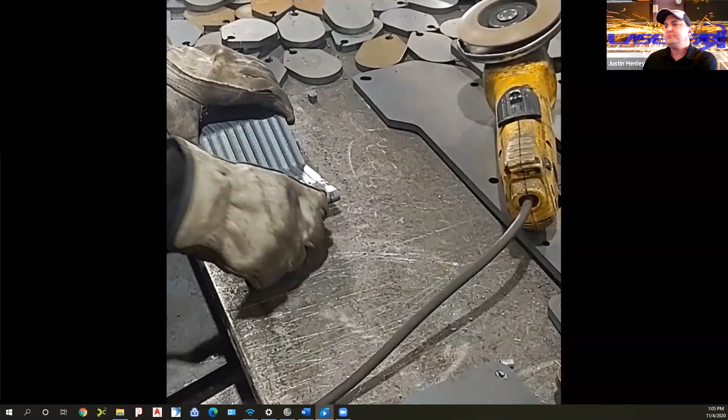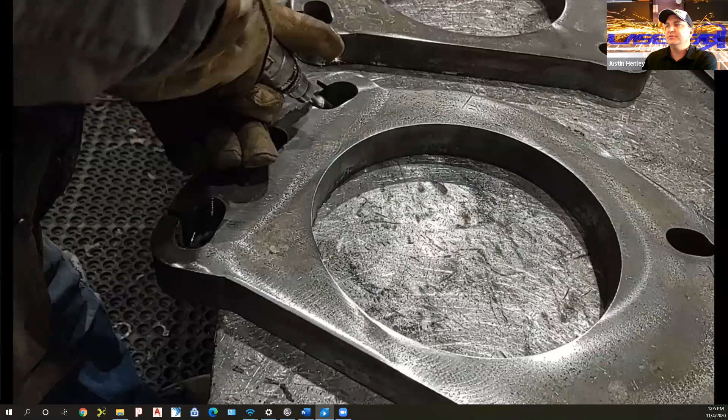So first clip is... oh, that's not the first clip. All right, first clip is deburr. Deburr is a process of removing dross and slag and tabs from cut parts. It's what you see, various hand tools, grinders, chisels, things of that nature. Our deburr personnel are integral in making sure that any imperfections of the parts are caught and handled before they move on to the next phase of the process.

And a brief job description for deburr, general labor, and production helpers: employees will be required to perform a variety of production-related functions and activities. Job responsibilities require discipline and attention to detail at a high level of accuracy, thoroughly following work orders and job instructions, using computer software to track work in progress, deburring, grinding, and part breakout with multiple types of hand tools. Must be able to consistently lift and move parts weighing up to 50 pounds, forklift operation, strong communication, interpersonal and problem-solving skills, the ability to work with limited supervision, and a commitment to customer service.

Have a proactive, positive attitude and strong sense of self-motivation, accountability, and responsibility. Able to learn to read and understand job travelers and use precision measuring equipment when necessary. Demonstrated ability to read and understand English in order to communicate and understand instructions and safety criteria. Proficient in shop math skills, accuracy with decimals and fractions specifically, manual dexterity and mechanical aptitude, have relevant computer experience including personal computer basics, forklift experience is preferred, and pass a pre-employment drug screen.

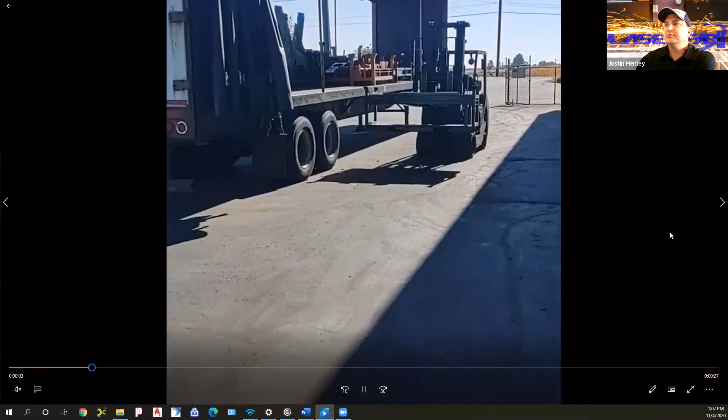The next video covers shipping. Shipping is what you would expect: the process of making sure that the parts we've made get to our customers.

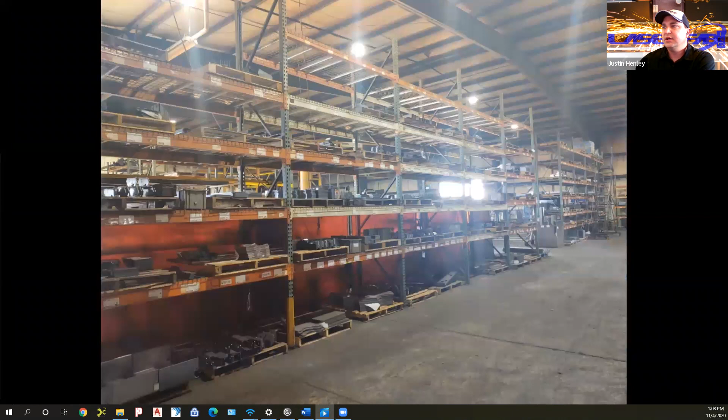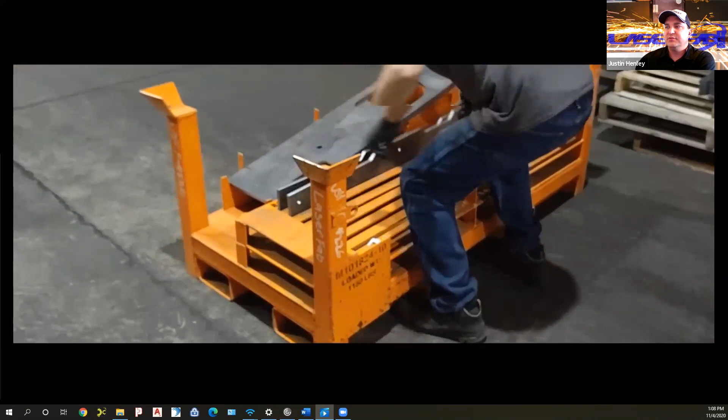We warehouse over 1,000 different part numbers for various customers, so it requires a high level of attention to detail. Specific customers have specific loading instructions and specific part handling instructions, so it's definitely a job that requires conscientious personnel.

The job description includes: receive and verify items, place material in bins or racks, count items, add totals on bin cards, pull items for shipment, deduct from bin cards, box, crate, and/or place on skid for shipment, complete documentation and load trucks, and use forklifts, pallet jacks, and strapping tools to accomplish most tasks.

Must be willing to comply with company rules and policies, pass a pre-employment drug screen, have a valid Washington State driver's license, be detail-oriented, accurately use tape measures and calipers, able to lift up to 100 pounds on occasion, able to read, write, understand, and communicate in English, have basic math skills, neat and legible handwriting, strong clerical skills, and a minimum of one year of forklift operation experience. Duties include placing manufactured items of various shapes and sizes in stock, pulling parts for internal or external customers, checking in received items and verifying paperwork is correct, cleaning up shops and yards as needed, loading and unloading trucks, and other duties as required.

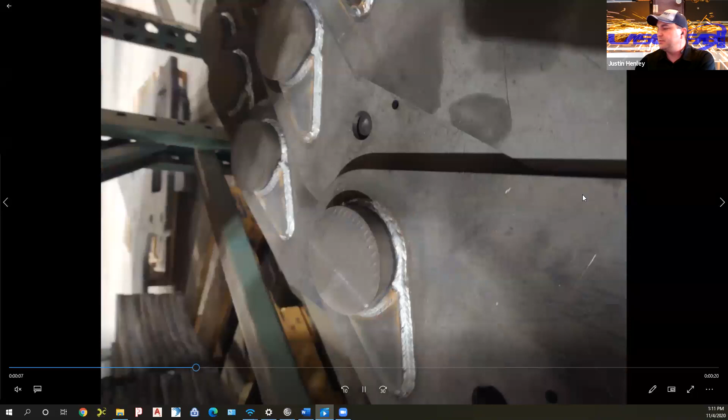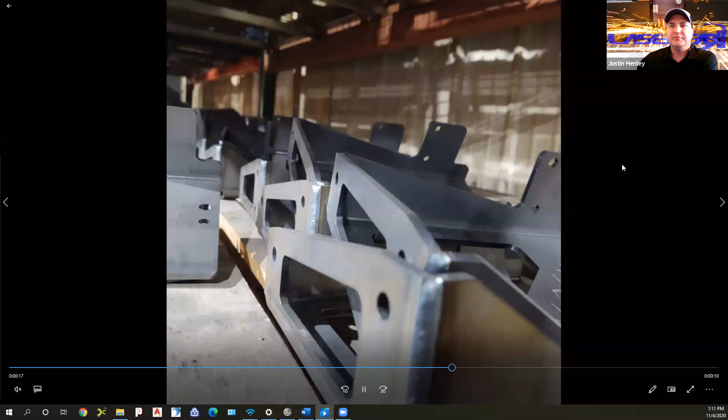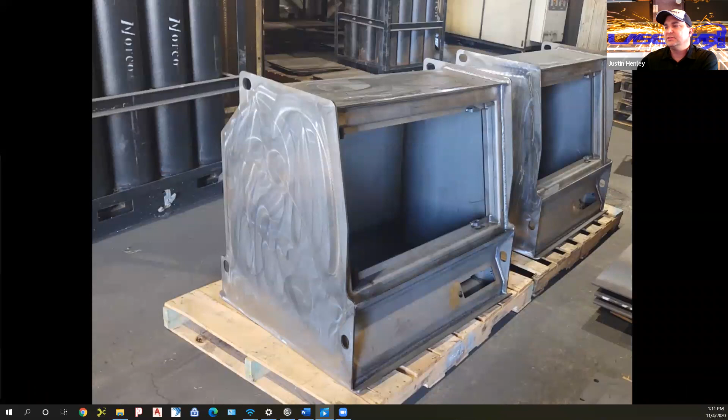The next video has to do with welding, which covers fabrication assemblies that vary from simple parts to more complex assemblies, with varying thicknesses and material types. This is actually one of our ballot boxes. We produce Vote Armor ballot boxes solely as a LaserFab product.

For a welding position, sheet metal fabricating, layout, and print reading experience is necessary. Experience is preferred in production and industrial fabrication equipment. Must be able to fabricate from shop drawings, with experience fabricating light gauge sheet to heavy metal plate. Must be able to hold tight tolerances, have experience using precision measuring tools, and have attention to detail with the desire to produce the highest quality work.

Ability to work in a fast-paced team environment, communicate and independently execute work instructions, basic math and computer skills, a positive attitude, dedication to attendance, ability to lift 50 pounds and stand for long periods of time, be highly motivated, and work with little to no supervision.

Must be able to work all shifts and overtime as needed, and pass a pre-employment drug screen. If that's not stated on all of them, we are a drug-free company at the federal level, so all employees must be able to pass and continue to pass random drug screening.

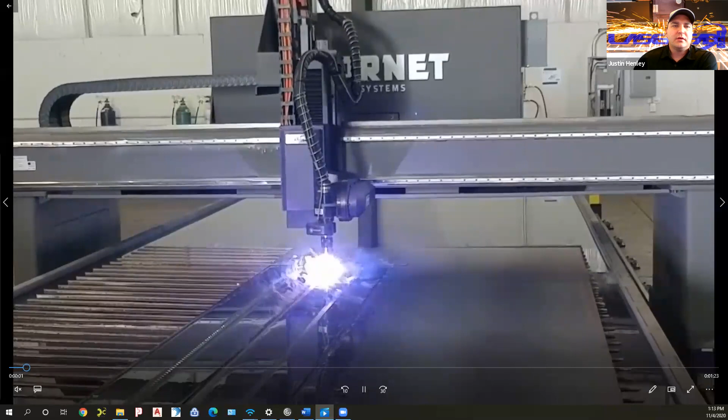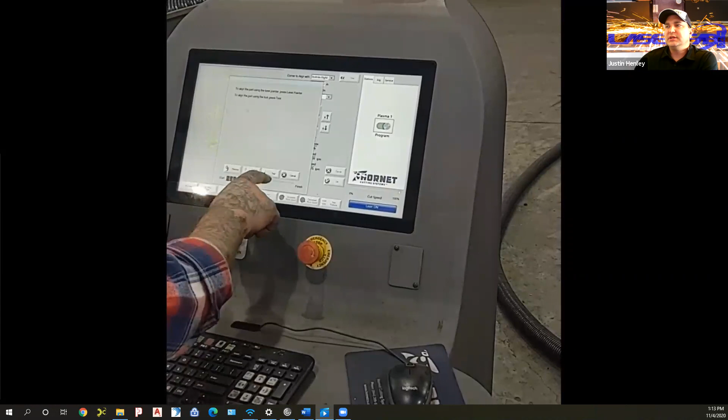We also have two high-def plasma cutters that we put in within the last couple of years. These machines are able to cut anything from gauge material up to 2-inch thick steel. Operators have to be able to interface with the control system, so basic computer skills are a must.

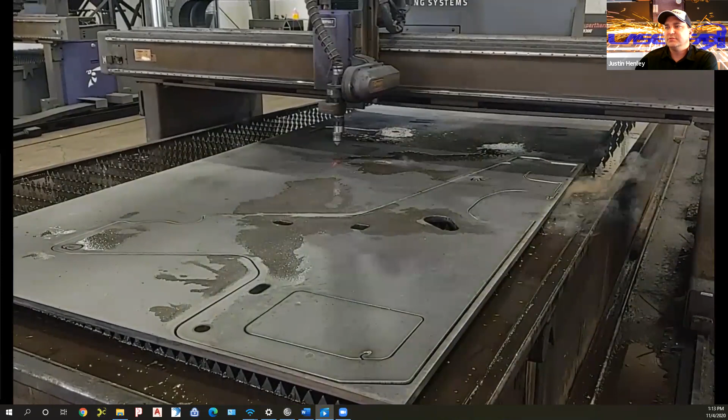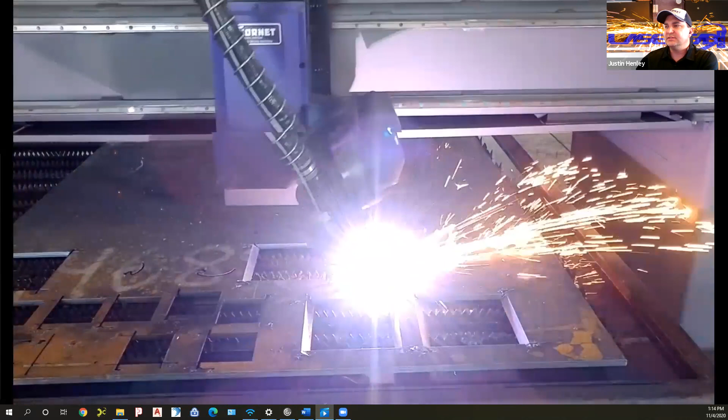The parts that come off vary in shapes and sizes. One of our machines, as you see here, is actually a 5-axis machine and can bevel a part in one pass.

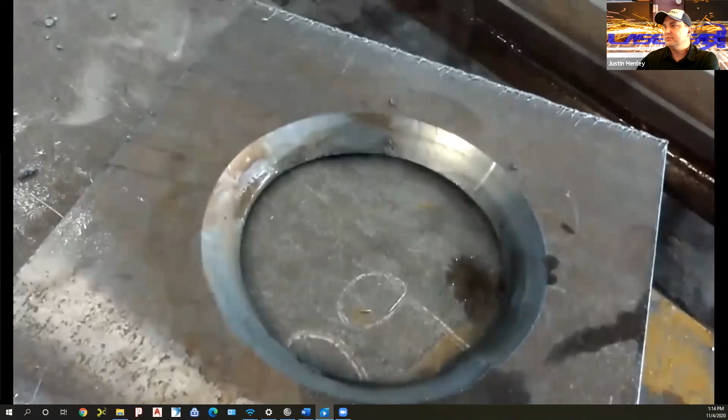Our bevel cuts can cut through up to 1.25 inches. Actually, no, I think we can bevel 1.5 inches because we can pierce 2-inch. Currently, that's a half-inch plate, and it's been cut with a beveling process.

The plasma job description is: perform setup and operation of cutting equipment to cost effectively produce high quality steel and stainless steel parts in a timely manner to meet customer specifications. Minimum 5 years experience in metal fabrication environment preferred, with 2 years experience operating CNC equipment. Essential duties are operate and maintain machinery in cutting department, understanding of blueprint symbols and terminology, knowledge of shop math and computer skills, work with a minimum of supervision, communicate status of work in progress with supervisor and or coworkers, maintain your work area in a neat and organized manner, ability to lift up to 50 pounds repetitively, ability to stand for 10 hours a day, and pass a drug screening.

One thing I would like to reiterate is that whereas a lot of these positions may require experience, the plasma operators we have currently did not have prior experience. One of them started out as a welder for us and now also runs the plasma. Another one started out just in deburr and has worked his way up to being an operator and operates the plasmas. And it goes back to a willingness to learn, mechanical aptitude, and initiative.

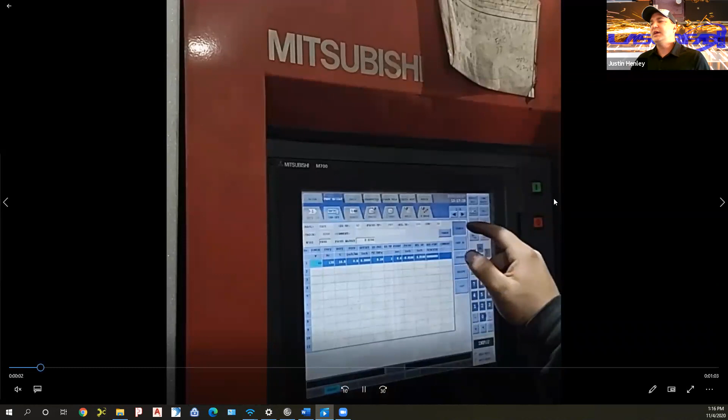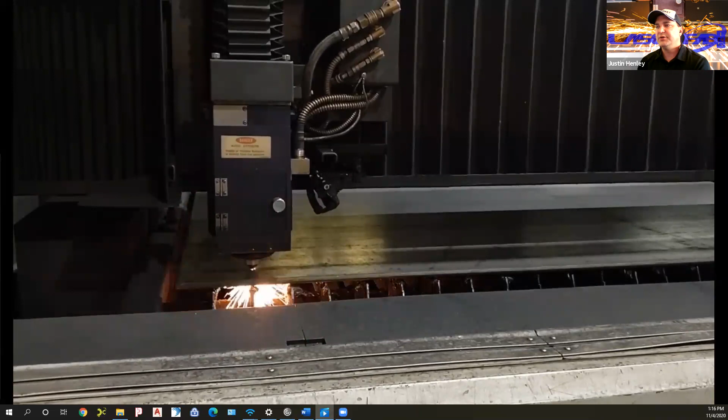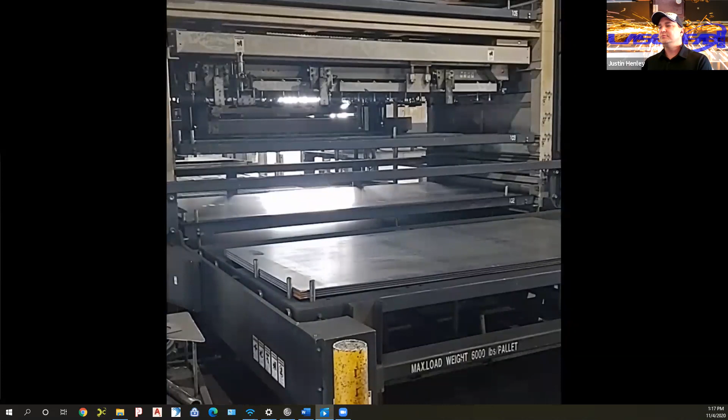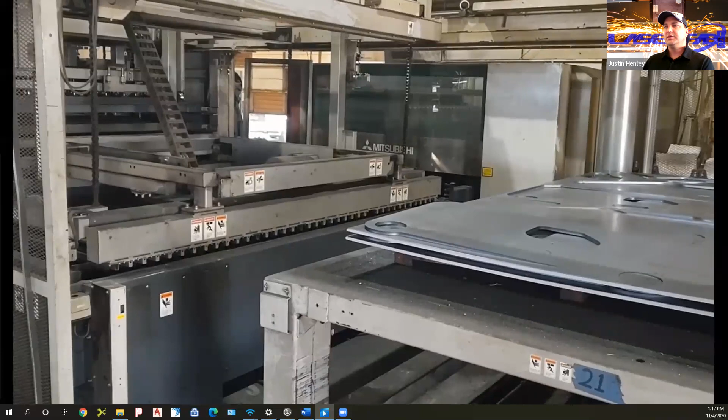Now our lasers, we have 3 CNC lasers, and they have a more complex system and have a higher learning curve than the plasmas, mainly because you're essentially using a beam of light to cut through steel. 2 of our lasers have an automated material handling system, which is another layer of education, so to speak, to be able to accurately program and troubleshoot that system. But it will actually load and unload the lasers and enables us for almost unattended running, completely unattended running for periods of time. Our lasers are able to cut up to 1 inch, but we typically cut up to 1/2 inch, and then anything over half we try to cut on our plasmas just for speed and efficiency purposes.

The laser operator position summary is: perform setup and operation of laser equipment to cost effectively produce high quality steel, stainless steel, and aluminum parts in a timely manner to meet our customer specifications. Requirements are 2 years of sheet metal fabrication, layout, and print reading experience. 2+ years experience preferred in a production industrial fabrication environment. Must be able to fabricate from shop drawings. Must have experience fabricating light gauge sheet metal to heavy plate. Experience using precision measuring tools, i.e. calipers, height gauges. Must have attention to detail and desire to produce high quality work consistently. Ability to work in a fast-paced team environment. Ability to communicate and independently execute work instructions. Basic math and computer skills. Positive attitude. Dedication to attendance. Ability to lift 50 pounds and stand for long periods of time. Highly motivated. Able to work with little to no supervision, and willing to work off shifts and overtime.

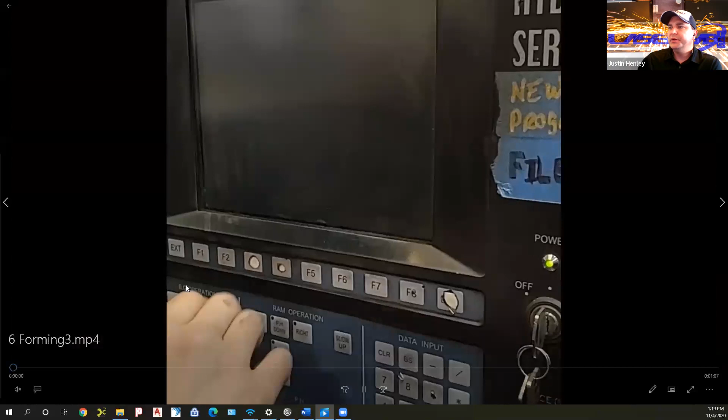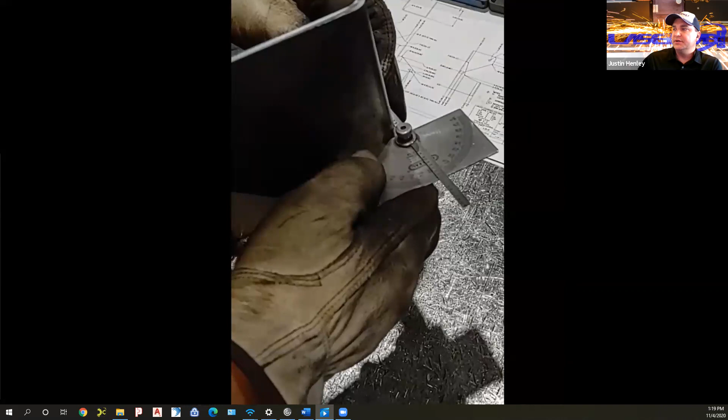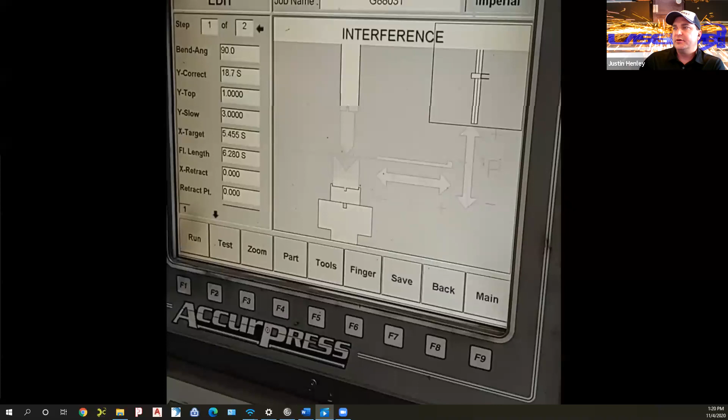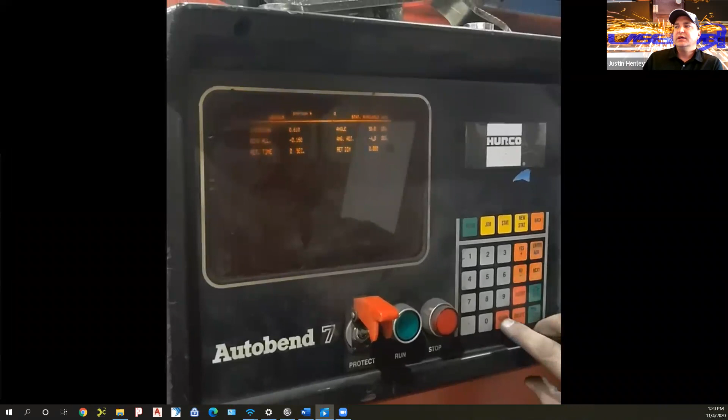Now we're under our press brakes, which we have 3 CNC press brakes, ranging from 50 tons to 500 tons. Our press brake operators, of course, have to work with a high level of safety and have to make modifications as they go. So they need to inspect the parts thoroughly as they're producing them to make sure that changes in materials and material density are not having an adverse effect on the finished product. Each of our press brakes uses a different control interface, as they're each one made from a different manufacturer. So each press brake would require separate training, but the basic fundamentals of forming and checking your parts and making adjustments remain the same. The different control interfaces simply are learning how to get what you want out of the machine and make sure you're inputting that data correctly.

Now, the press brake position reads as follows: performs setup and operation of press brake to cost effectively produce high quality steel, stainless steel, or aluminum parts in a timely manner to meet customer specifications. Requirements: 2 years sheet metal fabricating layout print reading experience, 2 years experience preferred in production industrial fabrication environment, must be able to fabricate from shop drawings, must have experience fabricating light gauge sheet metal to heavy plate, experience using precision measuring tools, as you saw, must have attention to detail, desire to produce high quality work consistently, ability to work in fast-paced team environment, ability to communicate and independently execute work instructions, basic math and computer skills, positive attitude, dedication to attendance, ability to lift 50 pounds and stand for long periods of time, highly motivated and able to work with little to no supervision.

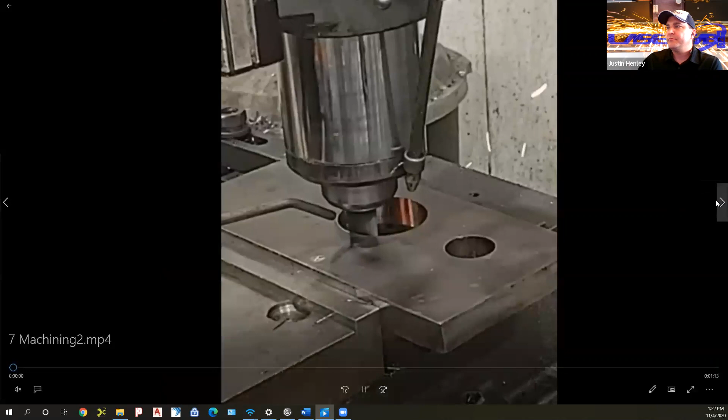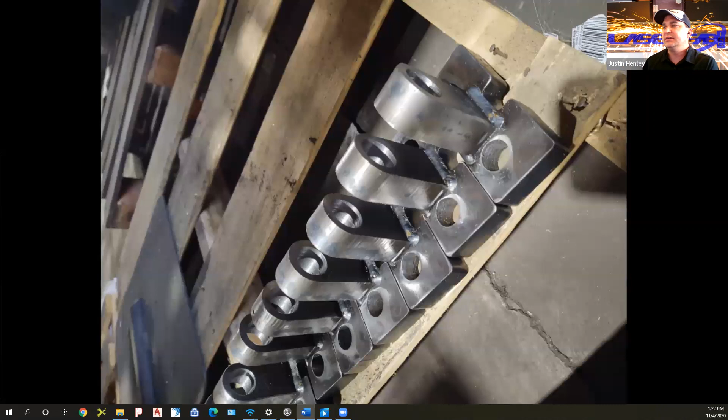We also have a machining department. And if you haven't noticed, the jobs tend to get a little more involved and require more skills and abilities as we progress.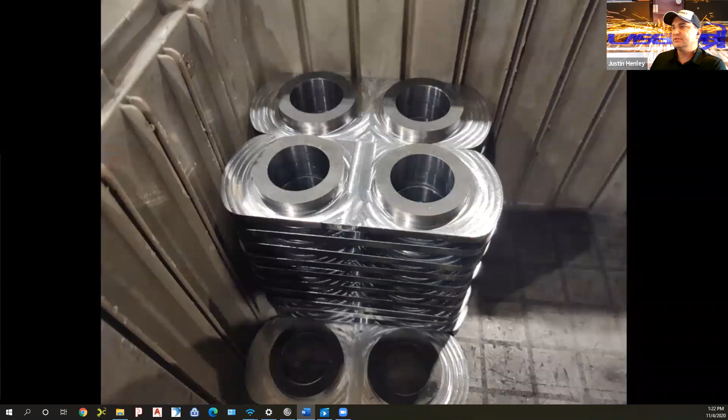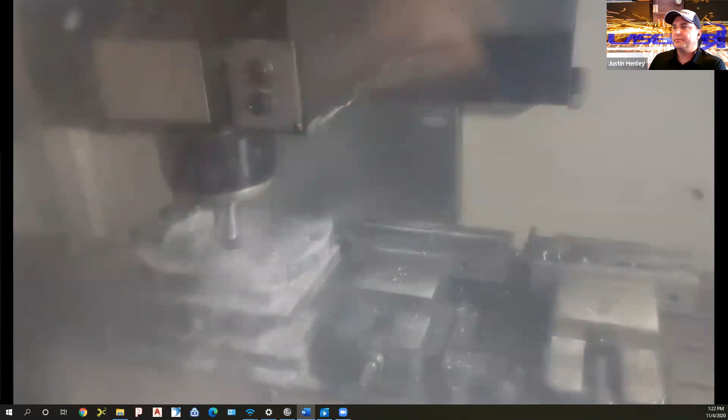Now, in our machining department, we use everything from pneumatic drills and thread cutters to programmable CNC equipment. This is our vertical CNC mill. You may recognize the part being machined from the previous deburr video. Right now, after being plasma cut and deburred, the parts are being machined for specific tight tolerance holes

and thread cutting in specified features. The machinist job responsibilities include producing machined parts by programming, setting up, and operating a computer numeric control mill. You'll be maintaining quality and safety standards, keeping records, maintaining equipment, supplies, and deburring and inspecting parts.

Plans machining by studying work orders, blueprints, engineering plans, materials, specifications, orthographic drawings, reference planes, locations of surfaces, and machining parameters, interpreting geometric dimensions and tolerancing.

Program mills and lathes by entering instructions, including zero and reference points, setting tool registers, offsets, compensations, and conditional switches, calculating requirements including basic math, geometry, and trigonometry, proving part programs, set up mills and lathes by installing and adjusting 3 and 4 jaw chucks, tools, attachments, collets, bushings, cams, gears, stops, and pushers.

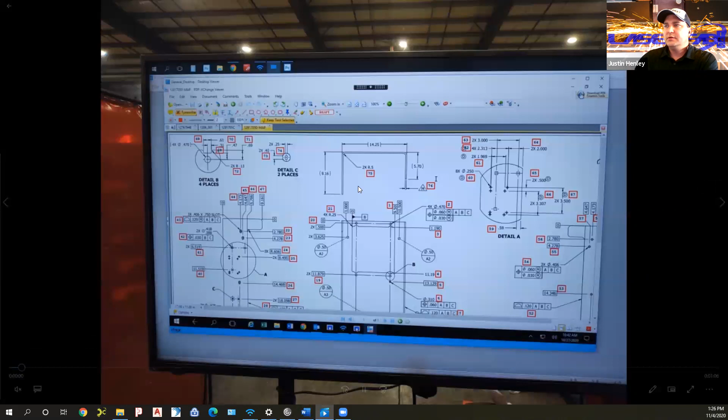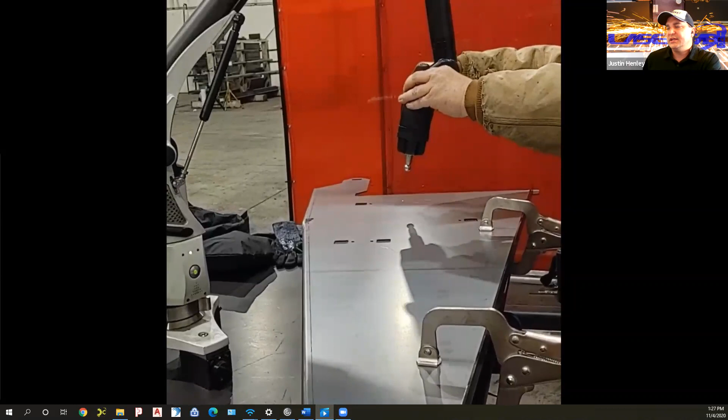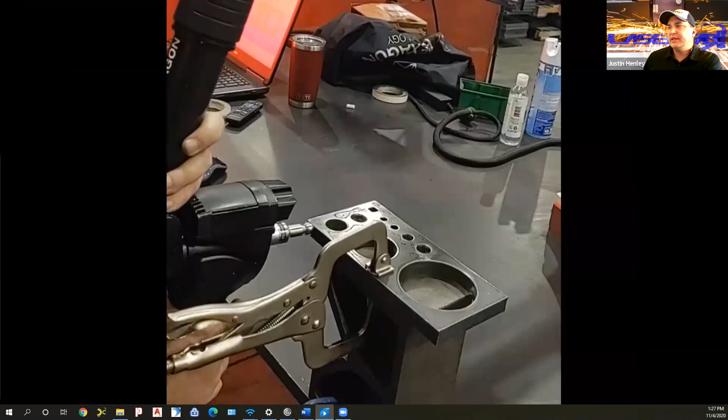Now, quality inspection. These are images from our 7-axis Romer arm with laser scanning functionality. As you see here, he's actually painting the part with a laser beam, and that is picking up data points, and then that part is being aligned with a 3-dimensional model inside of the software, and then you can see

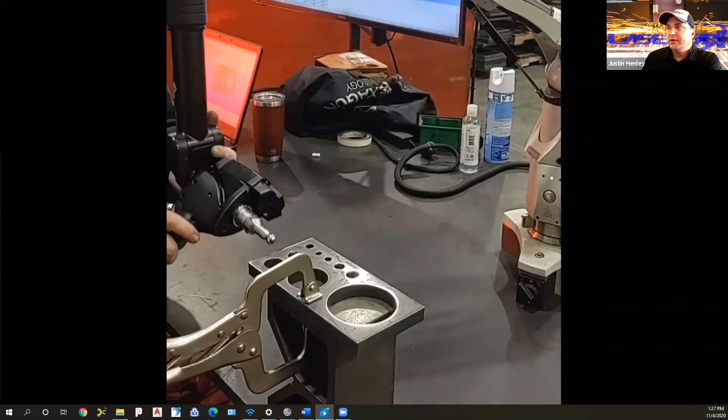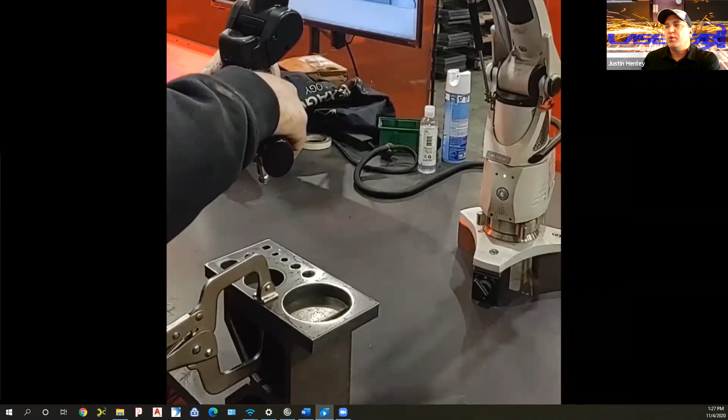where material deviations occur. As the parts become more complex, from the standpoint of tolerancing, especially with geometric dimensioning and tolerancing, it's required to check the parts with a process such as this one to check within 1/1000th of an inch at specific parallel surfaces, cylindricity, planar surfaces that you can't define accurately with simple calipers and tape measures.

For a quality inspector, this position will be responsible for inspecting incoming materials, fabricated machine components, work in process and finished goods to ensure conformance to customer supplied drawing and engineering specifications. These duties will include writing first article and non-conforming material reports and control of non-conforming products and materials. This position will be responsible for calibrating precision measuring tools and equipment. The position will also include assisting with maintaining compliance to company occupational health and safety program, policies and procedures based on WISHA standards. Experience and educational requirements are as follows.

CMM, which means computer... oh wait, I'm going to draw a blank on that one right now. CMM is an abbreviation for coordinate measuring machine, I believe. CMM experience preferred and additional training will be available.

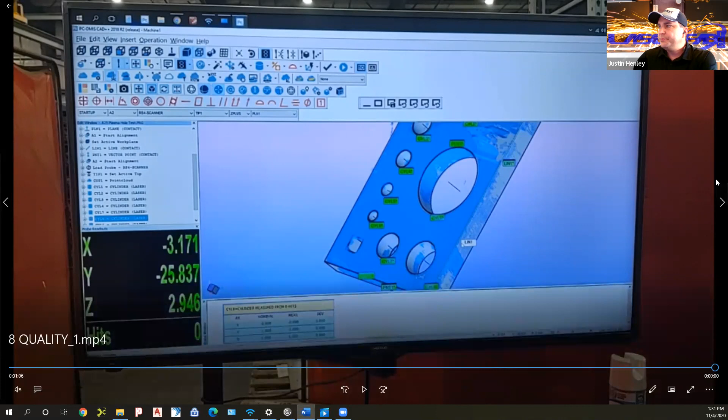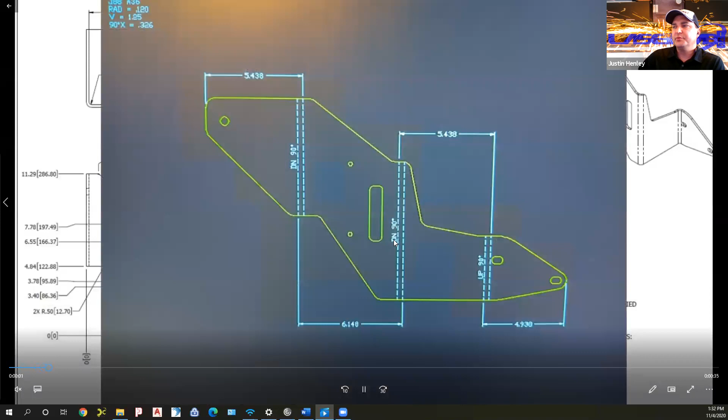And last, my job, CNC programmer, is a little more than simply creating programs. The first couple images you saw, which I'll back up, is actually from prints to CAD files. We create flat patterns. As you see here, this is a flat pattern that has been nested onto a sheet. And this is a simulation to check the NC path of the machine that's going to cut the part.

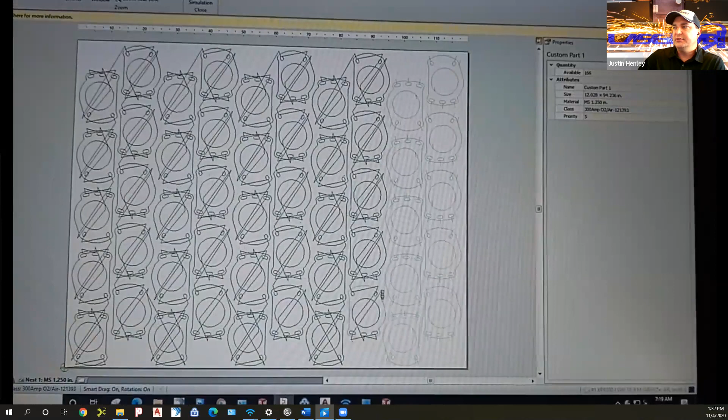You can see that I use multiple programs. I also do programming for our CNC mills, and I use AutoCAD and SolidWorks. And this is actually SOLIDWORKS CAM, which is built into SolidWorks Professional.

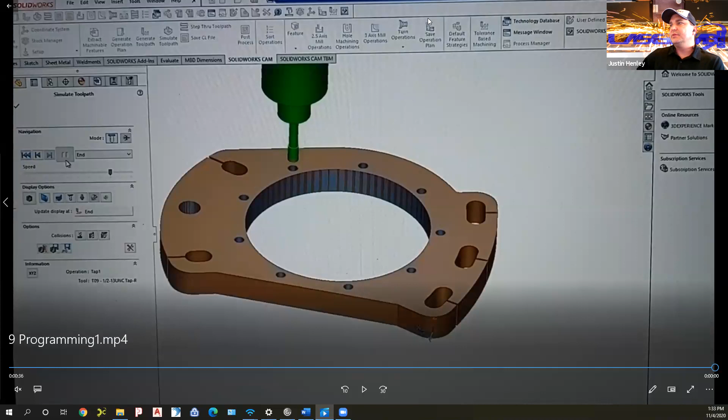And from start to finish, I get the CAD files that I will use to create our NC programs for cutting, after doing the math and creating the flat pattern development, which will allow us to be able to cut the parts and form them and have all the holes line up where they're supposed to be.

And either before or after forming, then be able to machine tight tolerance holes that may be beyond the capabilities of our lasers or plasmas, or if they need threads and things that can't be put in a cutting out operation.

And the programmer position summary is as follows. Breaks down information obtained from specifications, sketches, customer layout drawings, and instructions furnished by others, and converts the information into detailed drawings with section views and dimensions using CAD applications. Responsible for determining whether drawings can be executed and within expected tolerances.

Supervision is readily available, and work is sometimes reviewed by more experienced staff. May prepare bills of materials and specifications, working from engineering drawings and specification and using knowledge of machine operations. Develops code to control machine operation.

Prepares process plans, including positioning of carriage and/or tool, rate of feed, speed of rotation, tool changes, type of tool, sequence of operations, and other variables. May work directly with machines and machine operators to verify the accuracy and safety of programs. Typically requires completion of a formal drafting program and up to 2 years of experience.